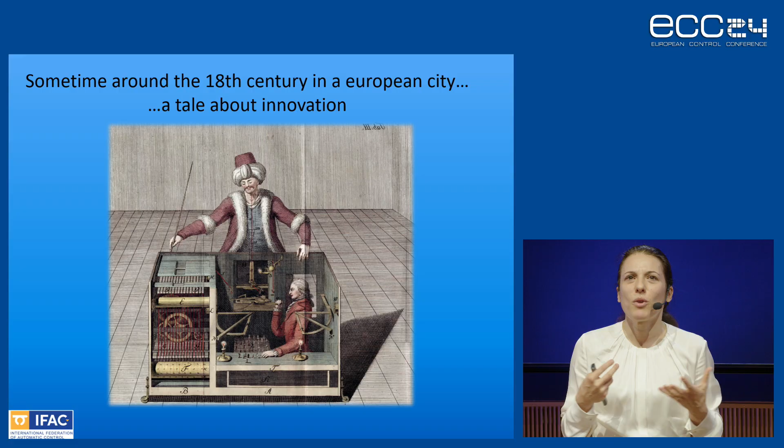During this period, one interesting device came about called the Turk, an automaton. In principle it was like a robot, presented in shows and theaters as a robot able to play chess, and it was considered quite strong—it played against professional players, and historically it seems it even played with Benjamin Franklin. It was amazing, really what we would see today as science fiction at the time.

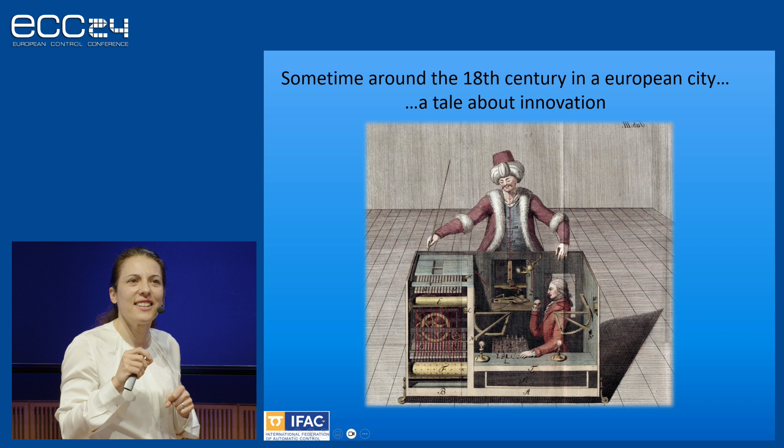What happened is that in reality it was a trick. There was actually a person hidden inside, a professional player, who would move the robot and determine the next step of the game. People would see this, be amused, and move on.

But somebody who was effectively the great-grandfather of computer science, Charles Babbage, a mechanical engineer, was fascinated and played himself with the idea of automation. He knew very well this was not possible at the time—the trend was there but the technology was not. What he did differently was, instead of just stopping and being amused, he asked: what would it take to make it happen? Where are we now? We're clearly not there, but what do we need to do? What would be an elegant solution, besides just hiding somebody inside to play the game, for this to actually happen? Several years afterward, he started moving technology towards developing the first computers.

This way of thinking is something we can apply within today's framework. Let's move to today's century. If we look at current technology and societal trends, we are still looking into automation—more automation, faster automation, better automation. And of course electrification and digitalization are in the air too—things we are all working on and aiming for in our daily life.

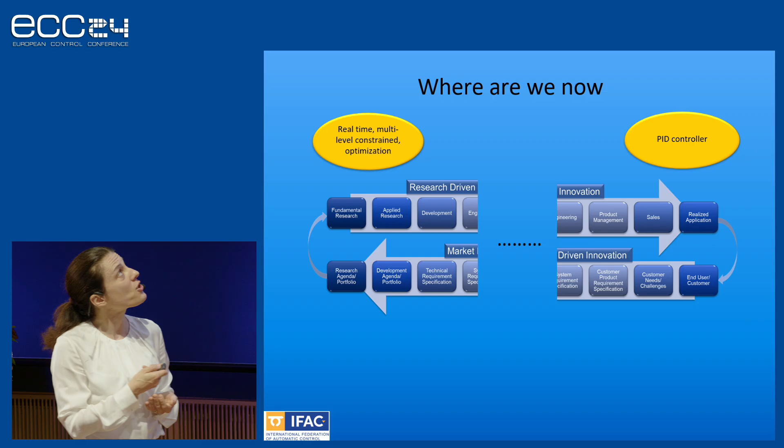On one hand, we have the academic community, the fundamental research community, which has made enormous steps in the last several decades. On the other hand, we have industrial applications—think automotive, but also industry, production, robotics—where in the majority of cases we still have things running on PID controllers.

So it's a huge gap. On the other hand, if we think about where we would like to be, there are existing technological trends and push to do more from the process and product side - things that people working in industry application want to see on their product. So the question we asked ourselves is: how can we develop an applied research agenda that could in principle be aligned with those trends, but also aligned with the real world trend and solution that we want to see on our product?

If we look a bit more in depth into this cradle of innovation, as we call it - an innovation cycle that collects the academic and industrial reality - we see three things. On one hand, we see the fundamental part of research, which includes fundamental research but also applied research, and a research portfolio, which is a series of problems that we want to solve. Then on the other hand, we have really the marketing - people that use products and solutions.

So those are users, right? Not necessarily technical people, but users that look at what they want to see in their product for the next generation. And all in between, we have engineers of various disciplines that try to translate the system requirement specification into technical requirement specification. And finally, we have the engineers that make those things happen - realizing it.

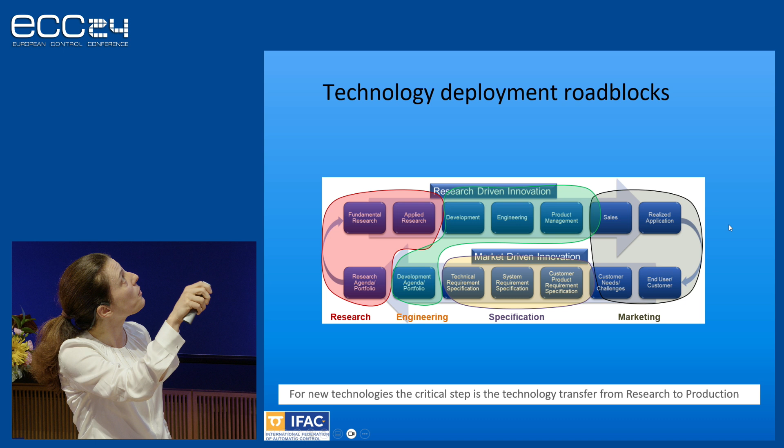So the problem is that often things get blocked here - they don't really go into the innovative part. This cycle will start maybe with some customer requirement specification that then goes up to, in a healthy company, develop a technical requirement specification for the agenda of development. This then goes into development, engineering, product management, and sales. So the whole research part, the whole opportunity, the whole potential energy of realizing much more is completely skipped. So here on the left, there is a huge potential of doing much more, but things get blocked.

One thing we did within the task force of the IFAC Industry Committee was really try to look and understand why things get blocked. To do it, we contacted different industries - we were in contact with different product management, but also control specialists that work in industry, and tried to understand why do things get blocked there. What is the issue, and how can we unblock them?

To give you another idea from the control perspective on how things stand with respect to industrial reality - if we take the map of control theory, which is by far not even complete, and look at the methodology that has been developed, and compare what the majority of industries are effectively using now, we see that we are really at a very poor ratio. So one first thing was to try to understand why this is the case - why are we still running our reality on PIDs?

There were 4 key factors that we identified. One was the different KPIs. The KPIs in academia are publication in high impact journals and conferences - this is what academics need for their career, for their success, this is what's important for the community. On the other hand, industry KPIs are mostly financially driven. Even though they're accompanied by the idea of pushing innovation forward, these two KPIs still play a bigger role - they have the majority of the weight in terms of what's requested by both communities.

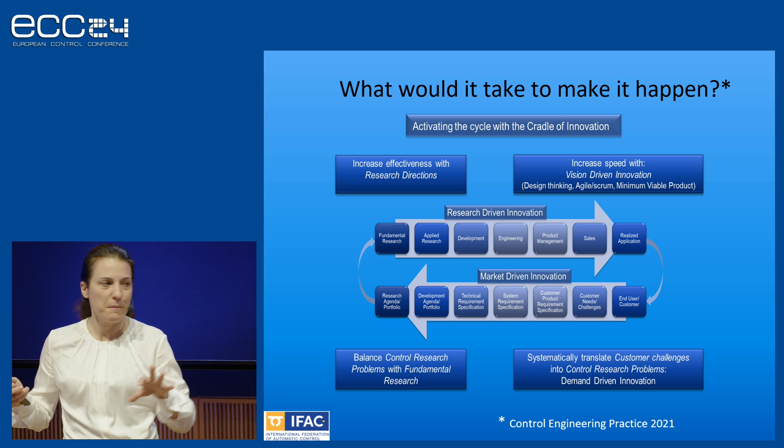Here I just give you a couple of examples of how these gaps can be bridged. On one hand, we have the cycle of innovation from research to eventually product. One typical example where things get stuck is when we go from fundamental and applied research to the jump into development.

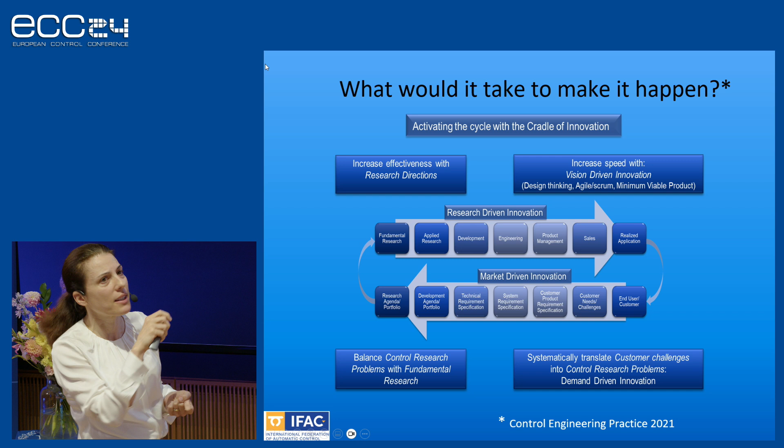One tool we identified was digital twins, because digital twins are something that companies in development and engineering use to test their solutions and do fast prototyping. The idea is, can we, from an academic solution, introduce this step a bit earlier? Could we create a small closed loop between applied research, development and engineering, and then go back and modify our solution so it fits better the development and engineering requirements?

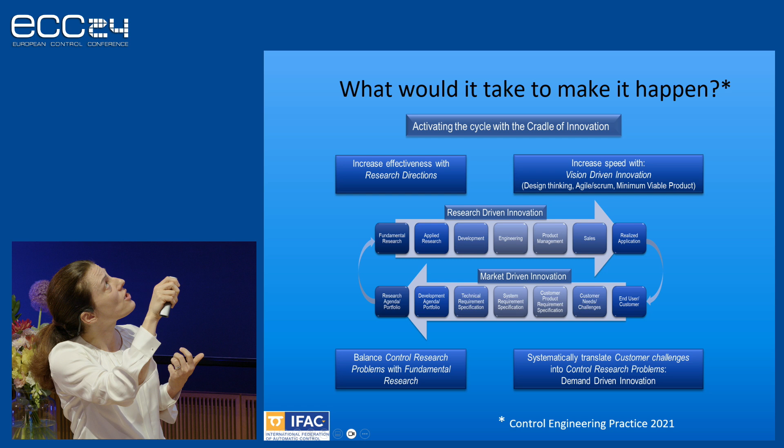Another thing is that tools like advanced simulation and digital twins could also provide some kind of demonstrator that can be used for the end customer, for marketing purposes, or to push a new solution.

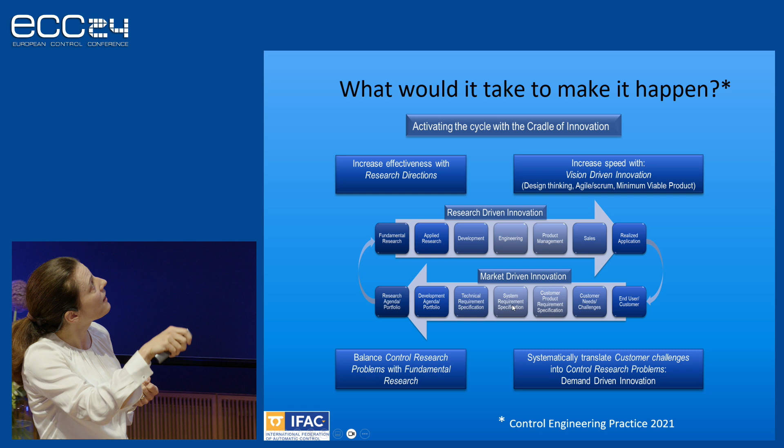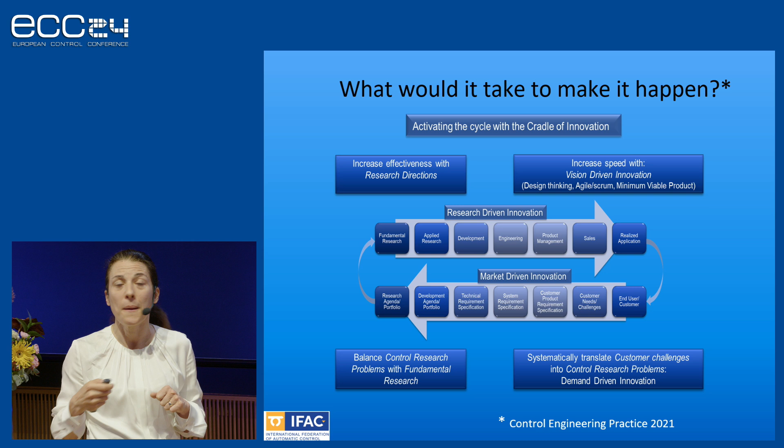On the other hand, from end user to the research agenda portfolio, it's fundamental to have what we call translators—people willing to sit down and talk with product management and understand what their problems are, what they want for their next product, and then translate these specific requirements into technical requirements and control problems.

I can give you one example from power conversion. A typical specification could be a customer coming to ABB and saying, I want a plug-and-play converter. With all the crazy things going on in the grid, plus the process requirements or industrial process requirements, I want to be able to put it there and have it adapt to everything.

Then the control engineer would come and say, okay, what can you measure? Specifically, what can you measure—voltage and current on the grid side, torque and speed on the machine side? From there you can interpolate, and the point would be: what's a good nonlinear system identification that would provide parameters for a nonlinear model of the grid or the existing load?

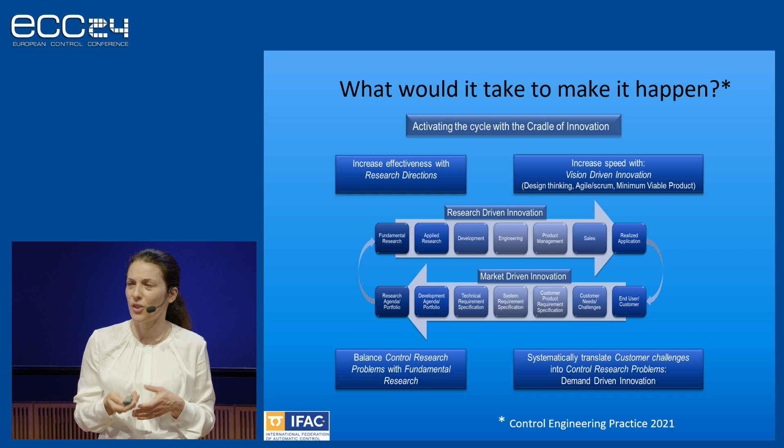So this gives you an idea of the kind of exercise we try to do across different disciplines, really trying to move toward a suitable solution.

What we did was assemble a team of more than 30 people, from both academia and industry. We put together an edited volume in which each chapter—there are six chapters—was dedicated to a different industry. The first part was on infrastructure and mobility.

There was the data industry, building automation, automotive control. The second part was energy and production: power conversion systems with ABB, robotic and manufacturing automation—which we'll hear about today from Efe and Alisa—and the process industry.

This cradle of innovation exercise was actually iterated across all these scenarios, and today we have the opportunity to hear two of these talks, from Alisa and Efe, and another from Peder. For the final part, Tariq will give us an introduction to the control horizon roadmap for 2030.

Having said that, I'd like to introduce our first speaker, Alisa. Alisa is currently an endowed professor at the University of Applied Sciences in Zurich, and previously was a group leader at Inspire. For this work, she collaborated with Efe, who was a postdoc at the Automatic Control Laboratory at ETH and is currently leading the innovation group at the Inspire Institute.

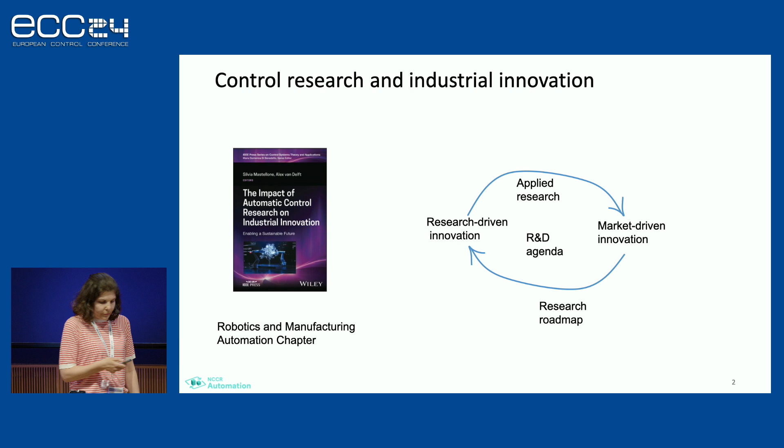And you saw the graph from Silvia. So I will show you, and Efe as well, examples, concrete use cases on how real challenges lead to innovation and valuable research.

In manufacturing and industrial robotics, there are two main innovation drivers: Industry 4.0 or 5.0 nowadays, and sustainability. Industry 4.0 is all about the availability of data, the computational tools we have nowadays, and connectivity in the cloud, which enable a lot of innovation. That innovation translates into advanced functionality and autonomy of the systems, improved decision-making capabilities, and optimized production, which is very important for industry.

And talking about optimized production, previously this kind of optimization was very much motivated by economic performance indicators. How does that work? So economic performance indicators, and technology development, was very much centered on this blue-green part that you see.

But nowadays, more and more, it becomes important to think about emissions, environmental indicators, and even societal performance indicators. This means our systems should be not just faster, better, and more efficient in the standard sense, but also cleaner, and adaptable.

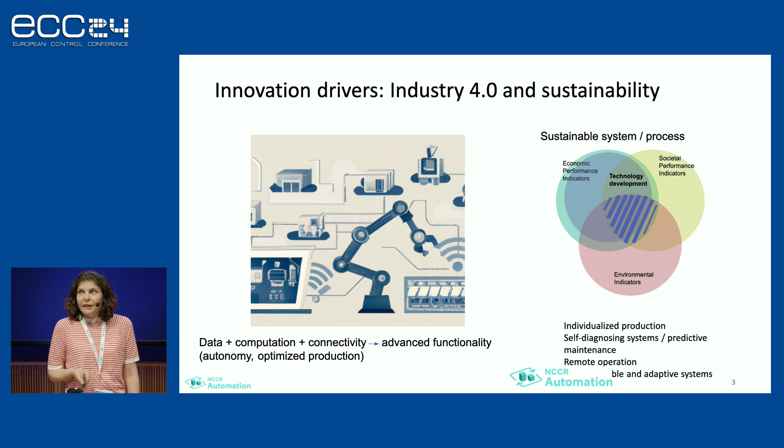They should be able to produce just single parts, self-diagnose, and also be operated remotely. And how to achieve this kind of adaptability is where our research comes into play.

If we put all this together, the big question is: how can we build manufacturing systems that can produce single batches, a batch of a single part, sustainably? And can the data we access help us achieve that?

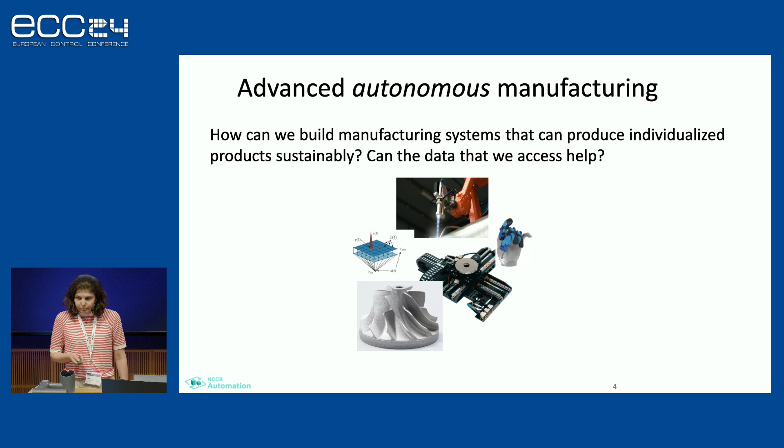Think about such systems and autonomy. Of course, robotics systems come to mind, and we can apply the same kind of system thinking in manufacturing systems.

Basically, the information that comes into such a system via sensors goes into a perception module where it is processed, and then mapping and planning is performed in the planning and decision module, and finally that goes into the control module and gives commands to the actuators in the manufacturing system. So this is similar to robotic systems.

In manufacturing, we need something extra, because we cannot measure all that we want to measure. We cannot look at exactly where the tool is drilling at the surface. That's difficult to sense, so we need to be able somehow to model and predict that.

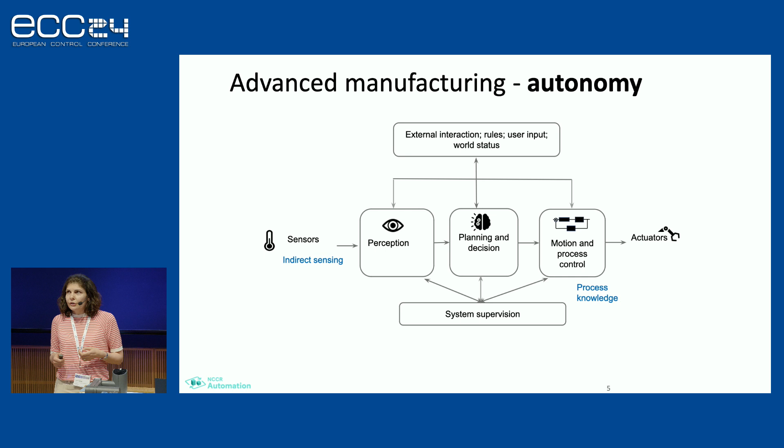That's why I put there indirect sensing. We also need some additional process knowledge, so what is happening exactly inside the part which is being drilled. And that comes from either simulation or some domain knowledge.

Staying here with robotics, we can make a parallel with the levels of autonomy for autonomous vehicles, where the low level is basically manual driving, and you need to look at the road and turn the wheel, whereas as you go up in automation, you become more and more hands-off, until reaching the high levels, where the car goes by itself, like the Waymo taxi, and finally it can go anywhere, not just in limited environments.

That's the dream. And if you think about manufacturing systems, where autonomous vehicles are at level 4, for manufacturing systems we are still between level 2 and 3. So very few such systems are actually able to self-adjust and be operated autonomously; they always require an operator.

Even very few of such systems have closed-loop control at all. They just get their parameters tuned before operation, and that stays. Then a new set of parameters needs to be found for each subsequent part that needs to be processed. So they cannot really operate with a large number of scenarios or parts, and they cannot operate in changing conditions, which is the opposite of autonomy.

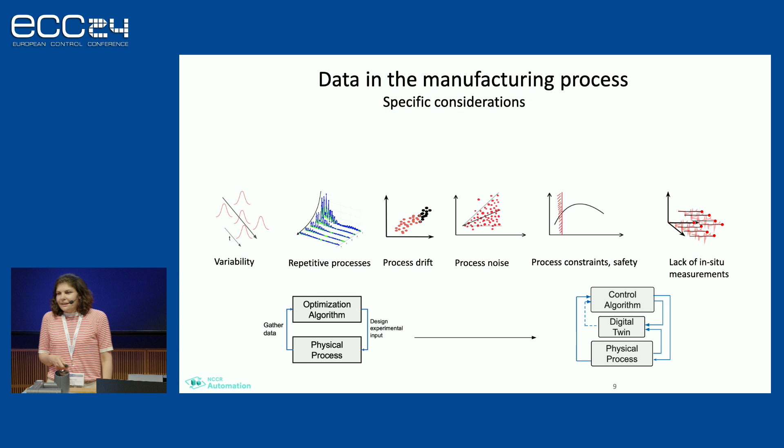This data that we gather can also help us build digital twins of such systems. The digital twin is a virtual replica of one instance in the manufacturing plant, let's say one machine. It captures one single machine.

Now I will start with a method which is very data efficient, so it needs just a little bit of data such that the machine can readjust its parameters. Later you'll hear more about digital twins and other methods.

This method is also known as Bayesian optimization. The goal is to optimize some performance metric, so we want to find good parameters for that metric. That could be good controller gains, or good process parameters of a manufacturing process, for example feed rate or spindle speed in a machine, and so on.

In this case, I will demonstrate it with tuning gains of a motion system. We have this performance metric, let's say the position error, and we want to find good controller gains for that, but we don't know where they are. We need to do that very quickly, because in manufacturing terms, you don't want to produce 100 parts to find good parameters. So we do very few measurements - just these two measurements.

Now we can use probabilistic models to model the dependence of our gains on the performance metric, and predict for the whole range what the performance is. We can predict that with very small uncertainty around the measurement points and with high uncertainty where we don't have measurements. If we have some auxiliary way to say where to measure next, such that either we find a better optimum than the one we have so far, or we learn a lot about the whole behavior of the function, that would help us.

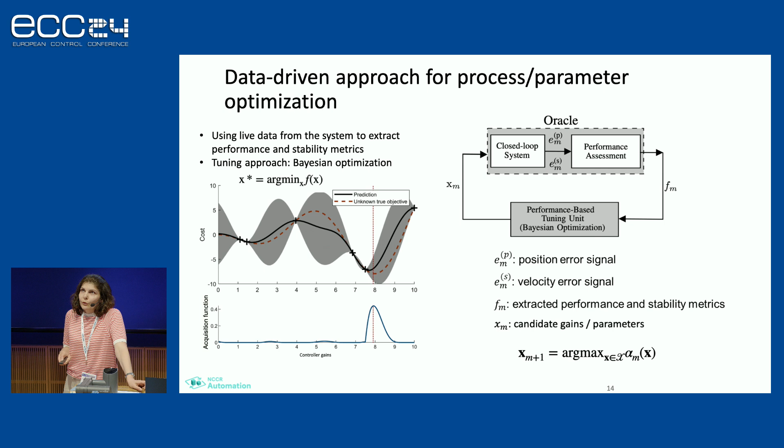This turns out to be efficient for manufacturing processes, because the goal is not to model the process very well, the goal is just to very efficiently find the optimum. On top of that, this could be combined with safety constraints, so with every iteration where we need to update, we don't violate the safety constraints of the machine.

We did that for all these systems that you can see - for additive manufacturing, for CNC machines, and for plasma spray coating. I will show you a particular example about a motion stage.

Basically, we define here that at every move of the stage, we want to find the best possible performance, and we don't want to excite vibrations. What we tune are the gains of the controller in this machine, and we cannot change the controller itself - we are limited, the controller is fixed. So we can only change the gains, and we apply this method.

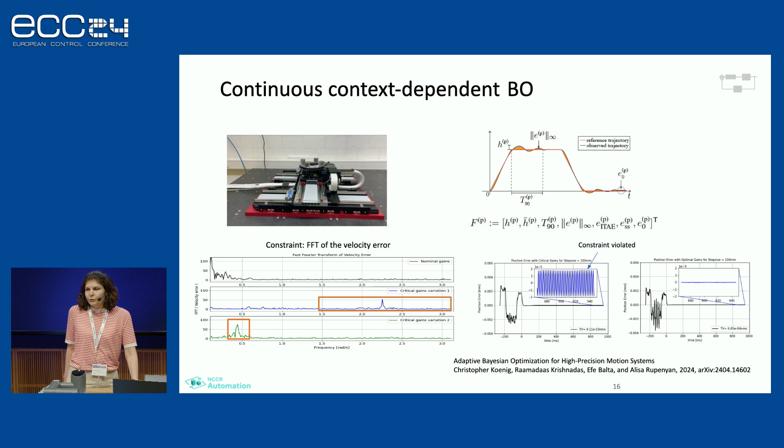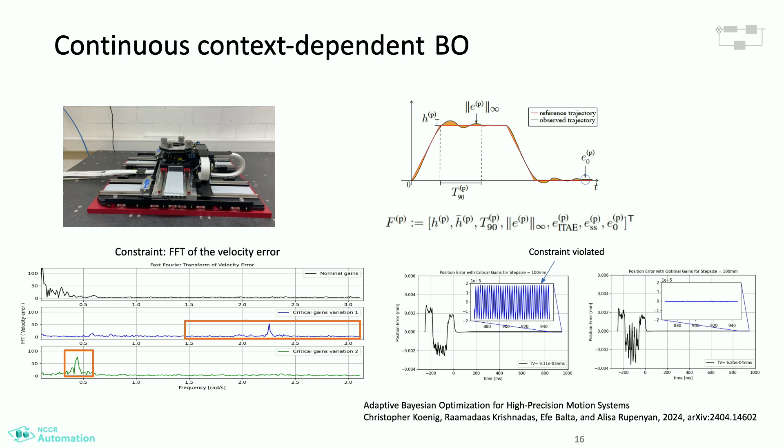We have a safety constraint here - this is the velocity error, the Fourier transform of the velocity error, which with every possible measurement that we do, we monitor to be below a certain threshold so that we don't see vibrations and don't get instability in the system. Because we want to continuously operate this optimization while the system is in production.

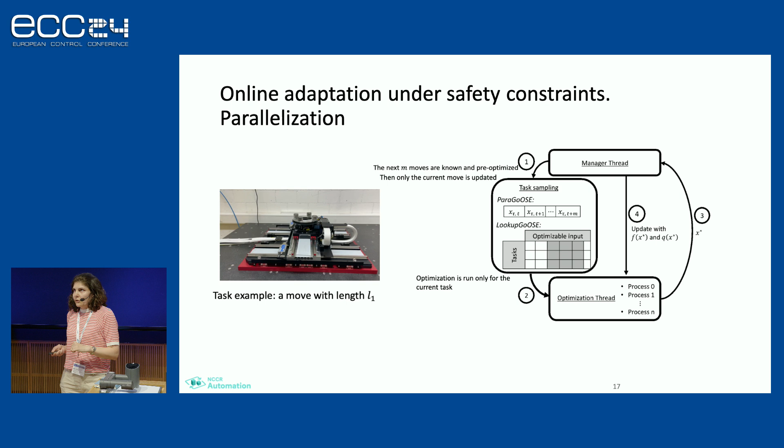To do that, we have to also be able to predict for the next moves what should be the good parameters, and we do that as a separate function of the length of the move. So we need some kind of parallelization and synchronization to do that, and we do updates between the runs.

Every time after the system moves, we update for a whole horizon of different possible moves and take into account the stability considerations, and that turned out to work pretty well. We were able to show that we can adapt to different payloads, so we can put different instruments on top of that system, and also different lengths of the move.

We compared it with various different controllers and tuning methods, and it worked better than those. So we were happy for that, and that was a real industry collaboration with the producer of such stages in Switzerland. It's about the optimization approach that you mentioned before. Yeah, it's indeed a good approach, but maybe the main drawback is the number of iterations that is needed to find a solution, even if it's not optimal, but it can be acceptable. Sometimes with companies, it's really difficult that they give you access to their process.

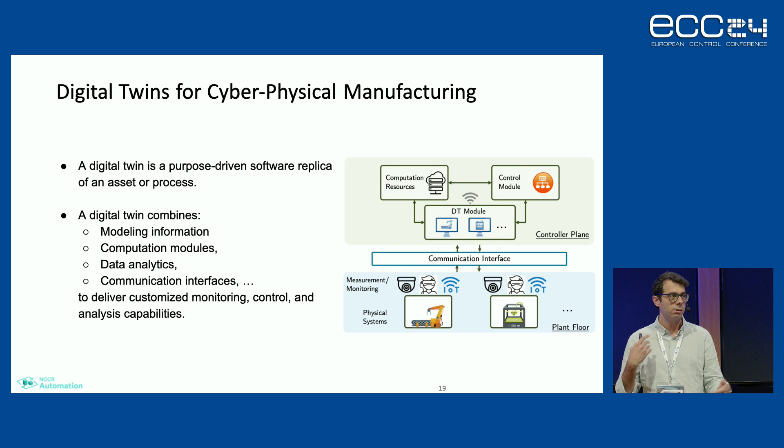And the idea is to combine modeling information, computation, data analytics, and some form of communication interfaces. So I think one of the key things is that it needs to reflect the specific instance that we're dealing with rather than a generic model, and this bidirectional, either for monitoring or controlling data flow, I think is some of the key aspects.

So one idea we had is, okay, actually it's a really nice follow-up to the question we had about multiple runs and accessibility to the machine. So then we asked the question, what if we cannot run, or we do not want to run additional steps on the machine to tune the machine? Well, a simple idea would be that I have a model of that machine, so I'll just run some trajectory optimization and put it on the machine.

This is really following that ideology to say that now we have this similar but different precision motion stage we have in Zurich, and we actually had a very detailed, high-fidelity neural net model of this precision motion stage. It's accurate up to the repeatability of our sensors. It's a data-hungry model, but we can tune it autonomously, letting the machine run for a few minutes, collecting data, and then we train a neural net.

Now, the question was, can we integrate this into a digital twin such that we can do trajectory optimization using this complex model, and then do everything virtually, and then take the inputs and run it on the real system. There are certain details I'm not going into here, but the idea was to use learning-based model predictive contouring control, learning between a nominal linear model and the digital twin model.

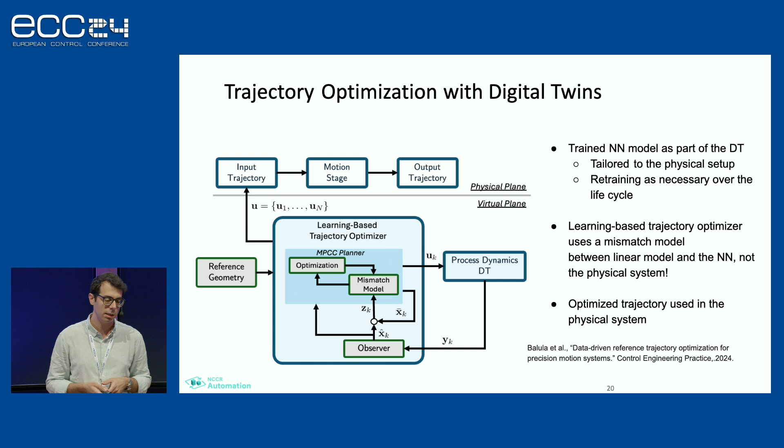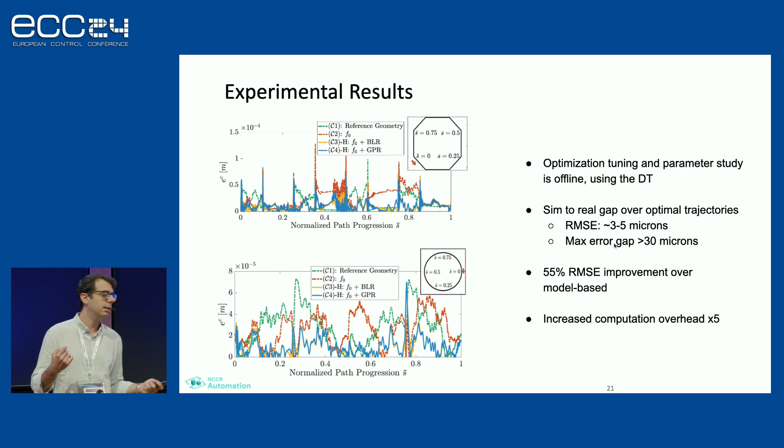When we did this, the sim-to-real gap of what we optimized versus what we ran on the machine, in terms of RMS error, was actually quite good, 3 to 5 microns, but the maximum error gap was much higher, indicating that certain aspects of the liveness of the system cannot be predicted by the digital twins. But in the end, we were able to improve the performance by about 50%, with increased overhead due to our computation.

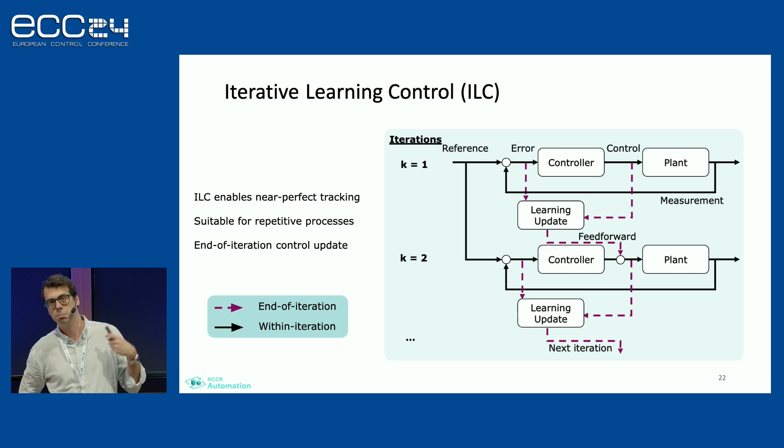Another idea we played around with was iterative learning control. In the interest of time I'll be brief, but the idea is we run one trajectory, learn from it, and update our input in the next trajectory, which is quite perfect if you have a repetitive manufacturing process. We've developed methods to deal with convergence guarantees under model mismatch, constraints, and noise.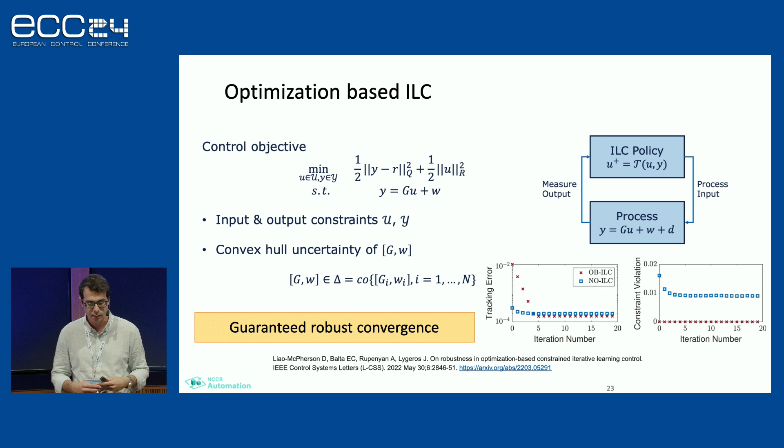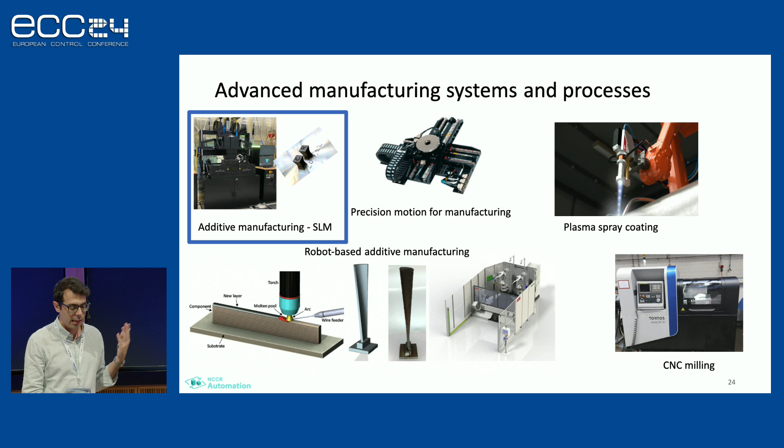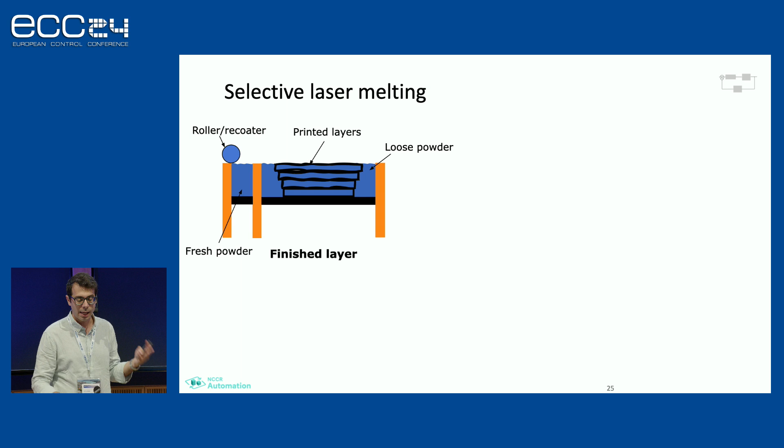The idea was that we prototype this in precision motion stages, and we asked the question: could we go to some of the other processes shown in earlier slides? We wanted to test these repetitive control, iterative control ideas on 3D printing applications, specifically metal printing, where we lay metal powder on each layer, then use a laser to melt the powder and let it cool down to obtain a three-dimensional geometry layer by layer.

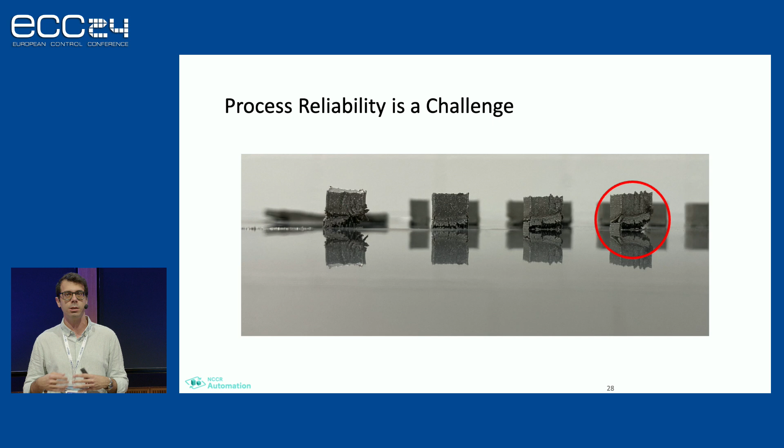The reason we wanted to do this—and this is one point I wanted to highlight—is not that we had the controller and looked for an application. We were approached by colleagues doing this application, saying there's quite a bit of process variation and reliability issues due to things like thermal management and warping in the system. So we thought we could use these ideas to build layer-to-layer control loops.

So what we ended up doing on our experimental setup was build this layer-to-layer control loop, where we use thermal cameras to look at the temperature field between the layers, and then use our ILC-inspired controllers to print two parts side by side.

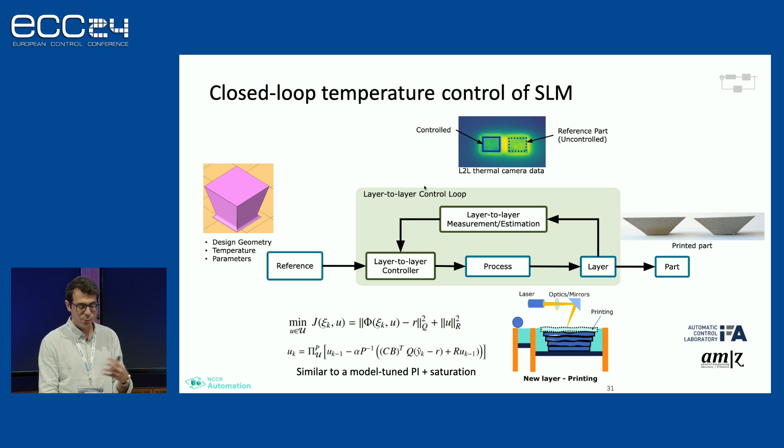I'll stop here in the interest of time. There are a few more slides, but I'll jump over—we also did this for in-layer control, so that was the rest of it. I think this will come back again on the panel talk.

Really, just to reiterate that manufacturing and robotics are data-rich application areas, and there's quite a bit of high-impact research opportunity by leveraging control optimization. We have a lot of really nice examples where practice inspires theory, and this is thanks to our colleagues—there's actually a very large team behind this work and our funding.

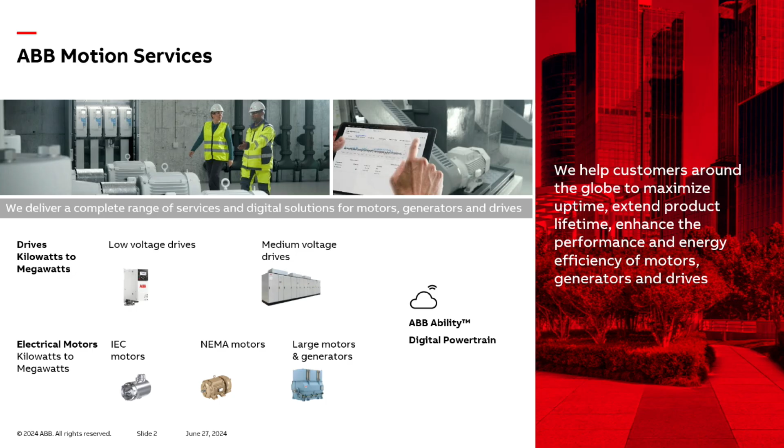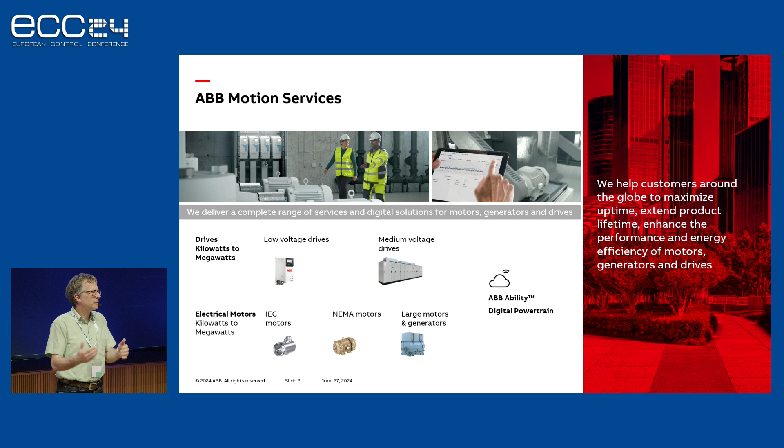Without big introduction, I'm with ABB Motion, and I have just one slide quickly showing what that actually means. It's called industrial drives also, electric motors, basically moving things in industry. My presentation will have no equations inside, and it has also no curves, because I thought I would rather talk a little bit about cases where we managed or failed in moving a control approach into a product and into money, basically, in the end of the day.

So where do we stand? Where could we go? So when we talk about a drive, it's actually a drive system, and these things can be fairly large. They can stand next to each other, be connected to the same process. They can even be maybe very hard connected with each other. And so you stand actually in front of a system that has many similarities with the energy system, but it's moving mechanical energy or some process chemical energy in a plant, but still it's a coupled thing.

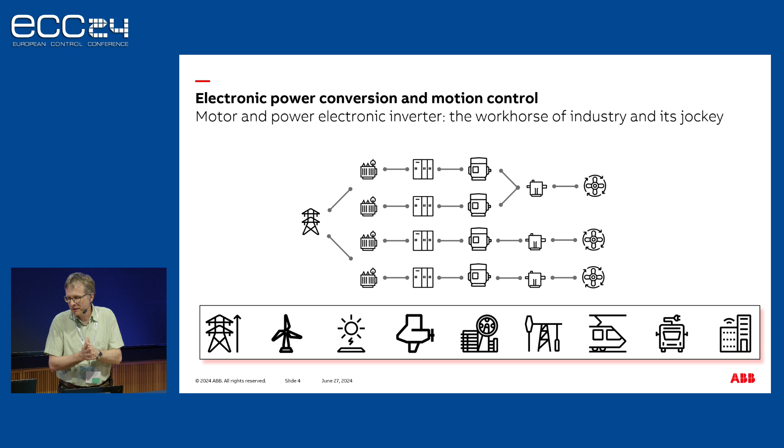So such a variable speed drive, yes, it is actually, well, it should be called a variable torque drive. It is actually a torque source, but last but not least, it's a control device normally. And that's what is expected by the user that it should do. It should ideally read the mind of the user and do the perfect thing that he just had in mind. Applications are really everywhere in industry, but also like moving ships or in transmission, moving power, compensating reactive power. So there is numerous applications for more or less the same hardware building blocks.

If we take a control perspective on it, what it actually is today, then we try to structure it in layers. We try a divide and conquer approach. So we have somewhere some power electronic systems that we have to control, and that has typically to happen on very fast timelines, 1 kilohertz, 10 kilohertz in this range. That's what many people refer to as a topology controller, and people are doing research in this corner, still do.

Then we have somewhere a middle range application control. So as an example, that could be controlling a motor speed, but relatively abstract, not knowing what the speed actually means. Yeah, the speed is responsible for discharge pressure of a compressor or for mole flow in a compressor. That is then actually the third level where we can talk about the system, drive system control. And that's actually the most interesting one, because this is the one where the customer is sitting, the one who invests in a drive system where he has some demands and some expectations how his system should operate.

I on purpose put below as examples, I put the industrial process side view. So the topology, this is controlling currents, maybe controlling power flow. Then in the middle range, we have typically torques and speeds. And then as an example, discharge pressure of a compressor.

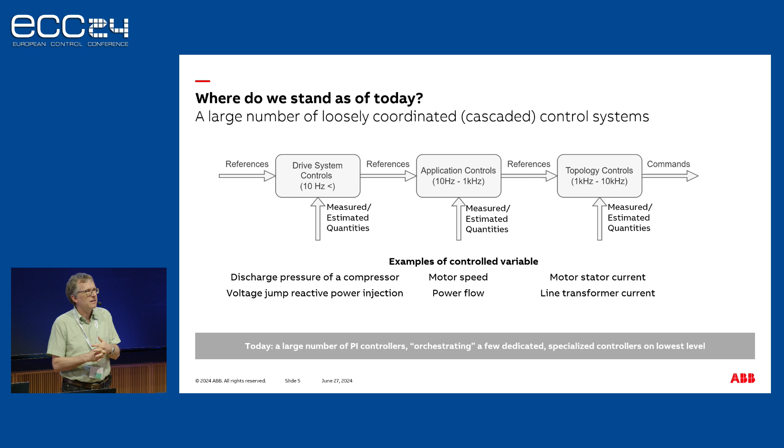But we should never forget there is also the other side. We're also connected to the electrical grid. And I've been in a few sessions now over the conference, the big topic on how to handle energy flows in the grid and help stabilizing the grid. So the line transformer current is again the low-level thing that we would actually control, but that's not even half of the job we should be doing. We should control power, reactive power, active power, but then we should also do more things. We should do good things to the grid, like helping controlling the voltage in the grid, or helping dealing with transients in the grid and mitigate them.

But traditionally, we tend to work in these silos, and that's probably one of the things that has to change in the next years, that we step out of the silos, or that we at least start to find cleverer interfaces between these areas of control.

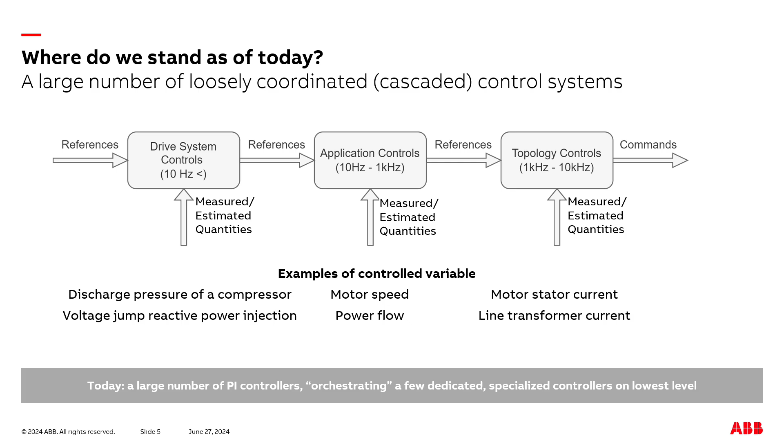And I tried to put that a little bit on a timeline, and I think we are not even moving with the same speeds on this timeline. On the motor side, when it comes to controlling power going into a process, we are actually moving slower, is my impression, than we are moving on the grid side when it comes to do ancillary services on the grid. So, I mean, traditionally, yeah, we have been controlling the speed of machinery, or on the grid side, maybe helped a little bit in providing frequency regulation, inertia support to the grid, things like that have been done already now since 2-3 decades.

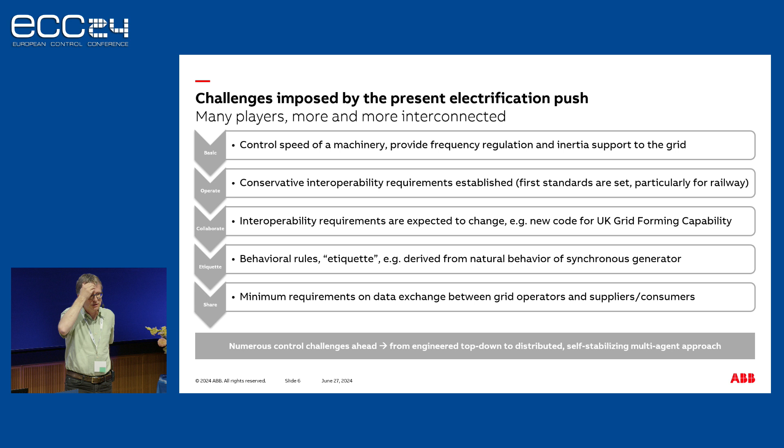And then on the grid side, I think interoperability has become a topic that was not only researched, but has also found results in norms that came up, especially when you talk about the railway industry. What is interoperability in this sense? It's how does an active unit have to behave in the grid so that things are really working together.

I mean, there is one controller, potentially a pretty aggressive controller, that just has some bigger target in mind and will just pull power from the grid, whatever it takes—jumps or oscillations—and may actually disturb another converter, which is maybe a little bit softer, and then doesn't get the power because the other one is unfriendly and takes all the power, hampering the voltage of the grid by its behavior.

In railway, this has been seen since the late 90s, and there are now norms telling how converters have to be, but these are typically very conservative criteria that have to be fulfilled—total passivity of the converters throughout the whole frequency range. Yes, that will work, but maybe conservative is not always the best.

The complexity the grid gets and the complexity the applications get—on the grid side, interoperability has now already taken the next step. Some countries have made big steps forward, like the UK, where they clearly identified a long list of ancillary services that an active unit in a grid could fulfill. And that needn't be a windmill or an SVC, a static converter doing reactive power compensation—this could also be a very large industrial plant driving some pumps that can alongside also provide some of these services.

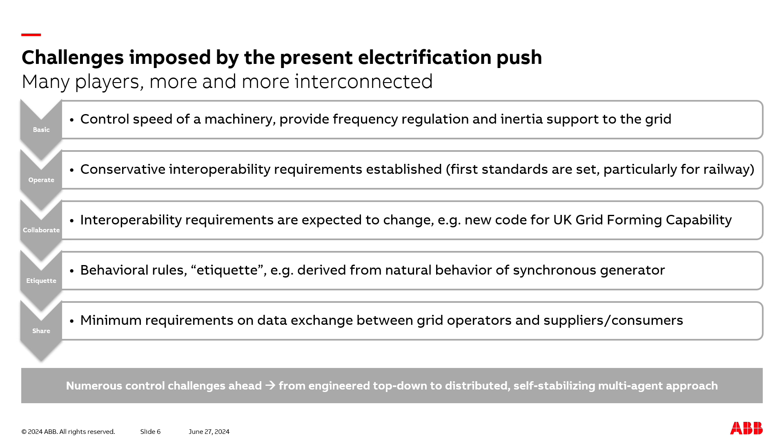And then the next thing, I think, is really behavioral rules that we expect to come up, so that we're not just putting some equipment somewhere—we're putting an agent into an industrial process, and this agent gets some rules he has to fulfill. He has basic rules he has to fulfill, power flow, but he also has etiquette—some things he's allowed to do and some things he should never do, and behaves like this without us doing a top-down design of a classic control system.

And I think what will come then as a last thing—we talk a lot about using data. Using data for analytics is now becoming more and more common. All these relatively clever devices that have a lot of computational power can collect a lot of info on the health of the driven equipment, but they could actually start to share that information also for the benefit of controlling things more optimally.

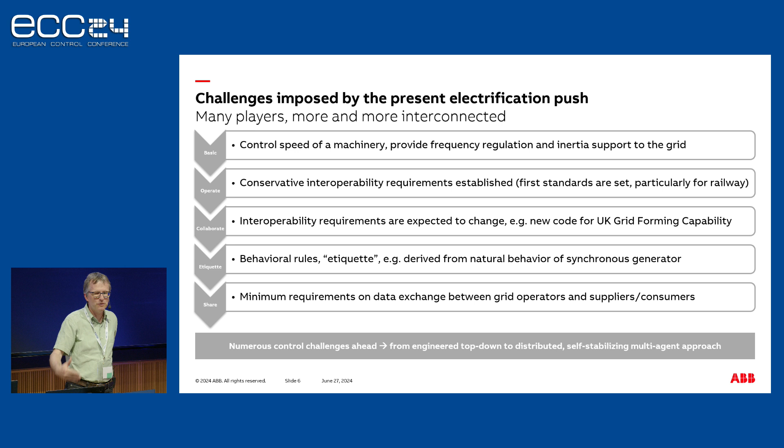So I chose two case notes, one that was really successful, a successful transfer, but I want to use the opportunity here to tell a little bit of the story, because sitting here in some of the presentations, it occurred to me that probably we have an issue of time synchronization. So it's not just that industry is slow, but we have to be in sync.

So if you develop products that you sell for 10, 20 years, which is quite common for the products that we have, you have to be there with a new technology at the right time. So that's the one thing. And then you have to qualify it, and you have a chain of customers.

You sell, or we, for example, sell to a compressor manufacturer. The compressor manufacturer sells the system to a pipeline operator, and then that guy actually probably even has some other involved parties really running the show. So you have to convince everyone.

So the timelines are different, and then this morning I also thought maybe we're also violating just the sampling theorem—that the hypes, the highs and lows that we see on technologies in academia, sometimes they're just oscillating quicker than we are able to sample. So my master thesis was a self-learning controller using three neural networks.

It was done at ETH in Zurich, together with ABB, in 1994. I see papers about it now again, and we flopped completely. I mean, it worked, but from a money perspective it was basically a flop, because it had numerous issues that we figured out we would never be able to resolve if we started using something like this. Now, 20 or 30 years later, we're moving in big steps further, but maybe the hype was already over by 1997 when there was that economic crisis in Asia.

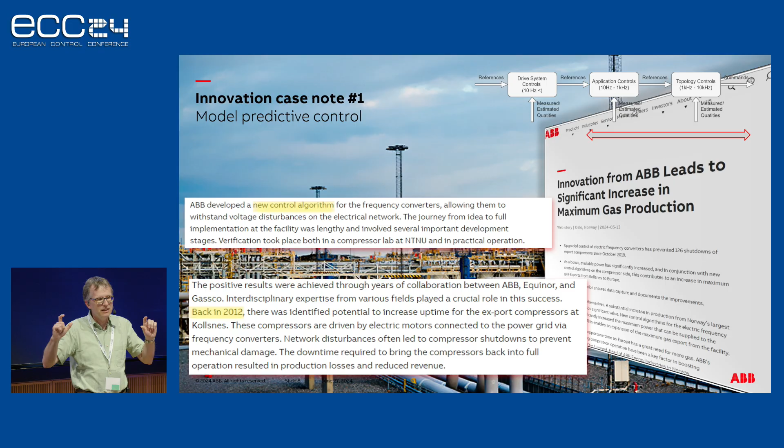And we felt MPC would also be a good approach in this case, because normally we're dealing with constraints coming in, and especially if two or three come in at once with just PI controllers, if that wasn't thought of before, you're going to fail.

So 25 years later, we have model predictive controllers running in one of our oldest drives from a technology perspective. These are drive systems we've been selling since the early 80s, from a hardware perspective, but we put a completely new control system into it now using a model predictive approach to do the topology control in this case.

These are converters connected to a grid. The converter itself has a storage inside, a big inductor where you can basically store energy as a DC current, and then on the other side you have a synchronous machine where you rectify, or chop this current into AC, so that you can turn the synchronous machine at the speed it needs. Throwing MPC at this problem brought us exactly the advantages we were hoping for.

These systems are interconnected. The case note we had, and this is literally the 25 years we've seen go by, is an announcement, a press release we just did in May this year. The plant has been up and running with this model predictive approach for roughly four years now. This is in Norway, a gas export station with 6 drives, driving 6 compressors, 41 megawatts each, accounting for about a sixth of Norway's gas exports, going into a pipeline towards the UK.

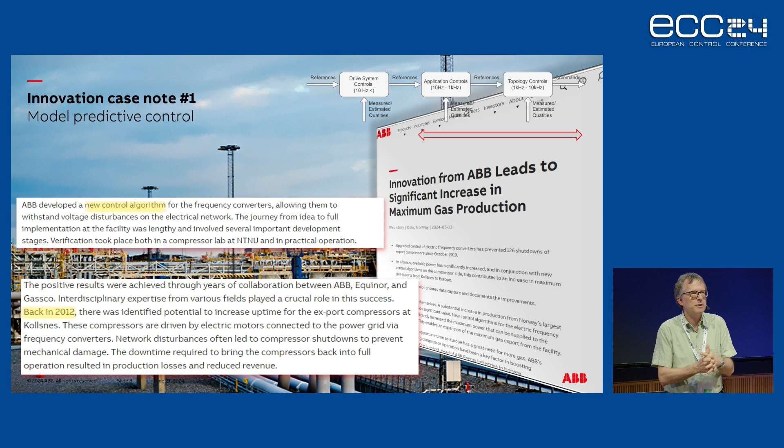In the past, this brought down the export station several times a year, especially over the winter period. Equinor, the Norwegian gas company, allowed us to publish that since it's been in operation we've saved about 126 such events where the whole export station would have come down. The current controller just struggles through every situation, but MPC doesn't give up, because it knows exactly what options are still available, how to fire a thyristor and still run some current and still drive the compressor.

Another example is also from the oil and gas industry. When you liquefy natural gas, it's basically just a huge fridge. There are compressors cooling down a refrigerant, and with this refrigerant you're liquefying the gas in 2-3 steps. We have been approached by the end user, the company that runs this facility.

This facility has several such lines cooling down the gas, on a massive scale. The process is actually fairly simple, you just want to cool down the gas. You can play a little bit between the different lines, scheduling which line is producing how much. If one line goes down for whatever reason, you basically have to burn the excess gas, because you cannot stop the gas coming from the well. So it's pretty dramatic, and they have a very big interest in having very high availability of the plant.

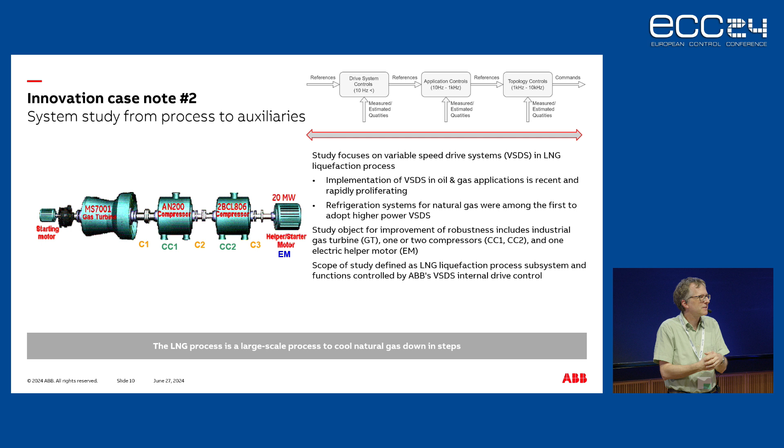Also, when we went into this system, we found hardware failing is actually extremely rare, maybe once every 5 years. But when going through all the reasons why the plant had actually tripped, we see that it's again this balance-of-plant issue: one controller is trying something, hits a limitation, cannot really interact with the other controller, and in the end just brings down the whole plant because the three control levels get confused.

So we started to look into it and said, let's come up with something. We called it a soft trip. It's something a bit more than an alarm, but it's not a trip either. When you get an alarm from a system, the operation goes on, but in this middle state we say the operation is actually deteriorating in a predefined way. For example, a torque limit kicks in, the motor runs hot, the torque limit kicks in but it continues to run with a torque limit. A signal is sent to the next layer of automation, and that layer can decide what to do with it.

Of course, you still have a number of trips, but it's actually surprising, it's about 10% of the things that could potentially shut down the system where you have no option, you have to shut down. But 90% you can turn into something more soft if you think a little bit about strategies.

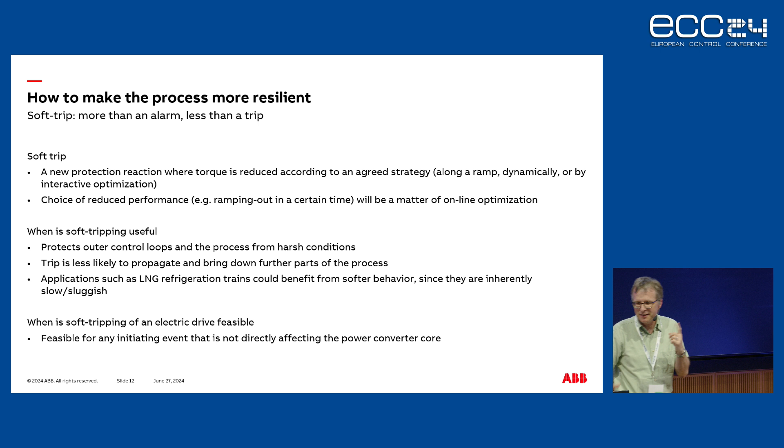But then the thing is, how do you make these processes work together? This is actually where I wanted to bring a bit of a negative example. What we really managed is that we've started a countdown: we limit the torque and count down, and depending on what is happening, you get a minute or you get 5 minutes to react.

This has also been implemented, so you can imagine, as we speak, something would happen, some operators will see some red lights and horns, and they are running around trying to reshuffle production in order to save the processes as a whole.

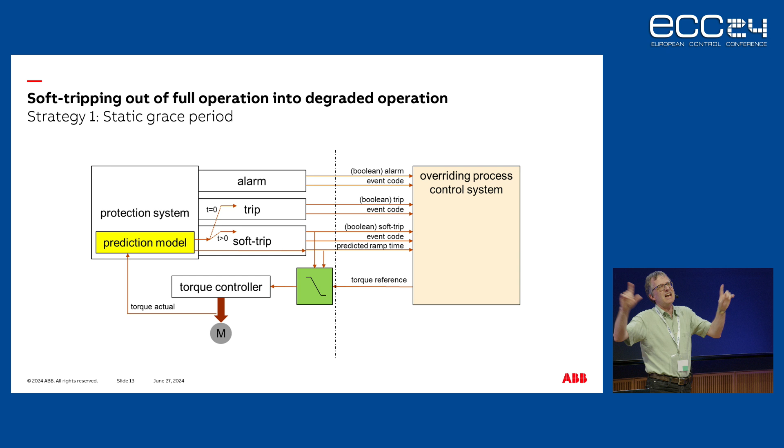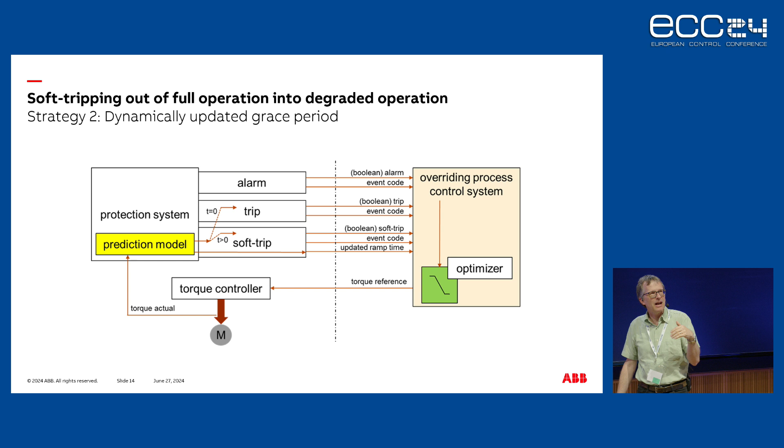But of course we said, well, at least the minimum we should be doing is not just giving a countdown, but also showing a prediction. So we say, I'm running now at reduced torque; if you allow me to run at even further reduced torque, then I can operate forever. So I give the next layer some option to decide.

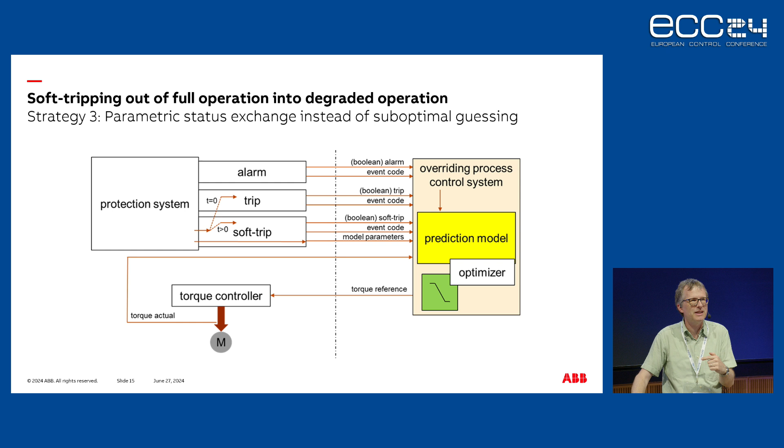And then the last thing we were thinking, well, actually the next layer should also be an MPC like we are, and we should parameterize somehow our behavior and tell it, with a handful of parameters to be defined, our health status, so an optimizer on the next level can really optimize. Didn't work out. We can discuss in the panel discussion why something like this is not working out. In brief, there are too many players.

So to conclude the research outlook or roadmap, I think we have to become object-oriented with how we do control of all these subsystems. Not brute force, top-down or bottom-up, but really objects that follow rules, that have interfaces, can talk with each other, and then design them like this.

Reality is we have many hardwired things. We just get a 4 to 20 milliamps signal telling us how quick we have to run or how much torque we have to make.

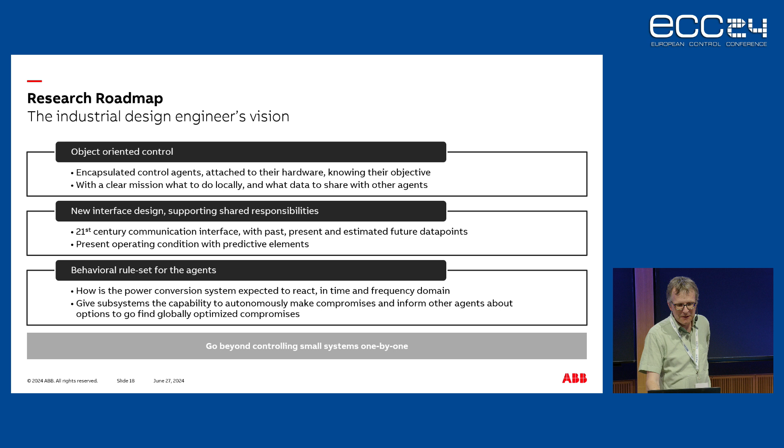Such things can also be found in the book chapter, of course. We have detailed a little bit more what we think in which directions we should be going. It's always both sides, motor side and grid side. But I think we have to shift paradigms a little bit here. So with this, I'll conclude my part.

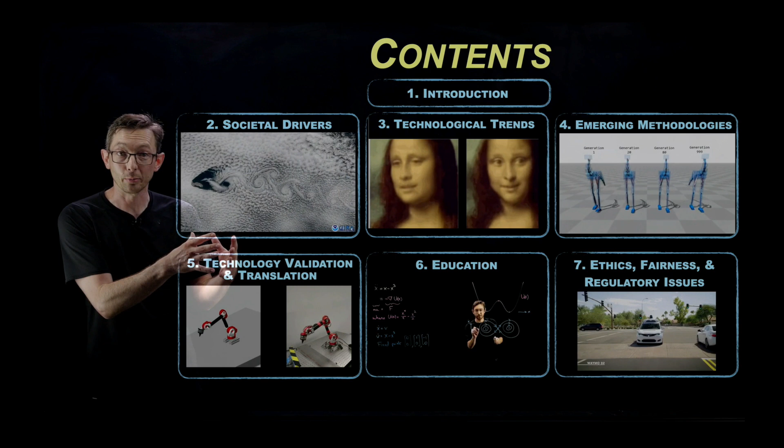The last big chapter is chapter 7, ethics, fairness, and regulatory issues, which addresses what are the actual issues with deploying societal scale control solutions to solve these challenges. One thing I really like, and I've seen in lots of chapters in this roadmap, is this focus on fairness and equity in how we deploy these control solutions. If you think about the equitable distribution of medical resources and medical care, that's actually a control theory problem, a constrained optimization problem. So I really like this modern perspective that we need to be thinking about fairness, ethics and equity when dealing with large-scale control theory solutions, so that we don't only help a few and not everybody. A neat perspective here, and an important one too.

Finally, chapter 8 is a conclusion, summary, and recommendations - how do you take this all together, what are next steps, how do we get started, how do you join the cause? Really excited to walk you through this. Again, this is a collaboration with a number of amazing researchers that I respect very, very much. I hope you get as much value, education, and inspiration out of this as I did.

All right, thank you. I hope that will motivate some of you to download and read the report or parts of it. What I want to do in the rest of this talk is give you an overview of some of the content that's more relevant to the theme of this session. So again, I'm showing you the overall table of contents, just so you can take a glance at it if you can read that at all.

But then the two parts I'm going to focus on are, one, climate change mitigation and adaptation, because I was a co-author on that, and in fact it's organized around industry sectors and application sectors. And the other one is technology validation and translation.

Regarding this chapter on control for climate change, there's been a recent issue of Control Systems magazine with an article that's an extended version of that chapter, so you can access that now. It really addresses climate change, talks about it in a broad sense of what the challenges are, but also specifically in terms of what are the targets of opportunity for control scientists and engineers.

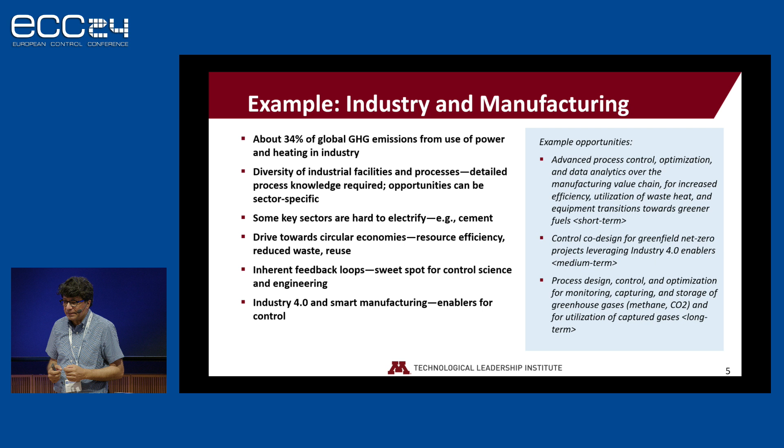The example opportunities we highlight here are categorized by short-term, medium-term, and long-term. Short-term means we have the potential to have impact at societal scale by 2030, medium-term is by 2040, and long-term is post-2040.

So the example opportunities: advanced process control, optimization, and data analytics over the manufacturing value chain for increased efficiency, utilization of waste heat, and equipment transitions towards greener fuels. Again, referring back to that fact that we can't just expect electricity to do all the job for us, we'll need fuels as well.

Control co-design for greenfield net zero projects leveraging Industry 4.0 enablers. Of course, there are brownfield facilities, facilities that already exist, and we need to reduce their carbon emissions. But a huge opportunity is new projects, greenfield projects. Now we have the opportunity, a fresh sheet of paper that will provide us more opportunities to apply some of our techniques and reduce emissions.

And lastly, focusing more on storage of greenhouse gases such as methane and CO2 and their long-term utilization. That's also a really important need. We'll need to do that as well. So that was one example of that.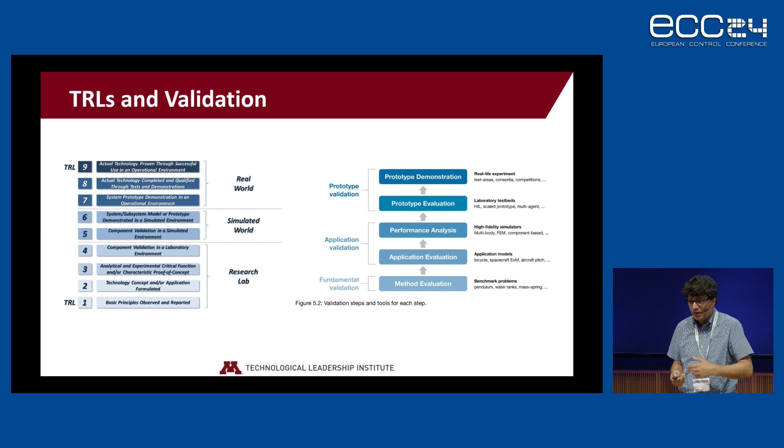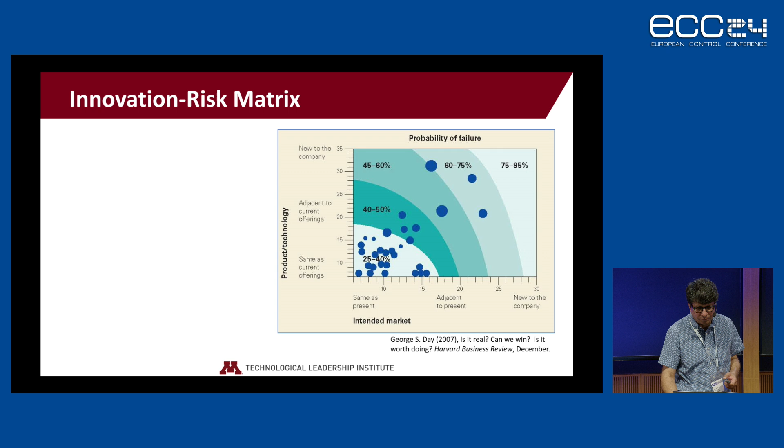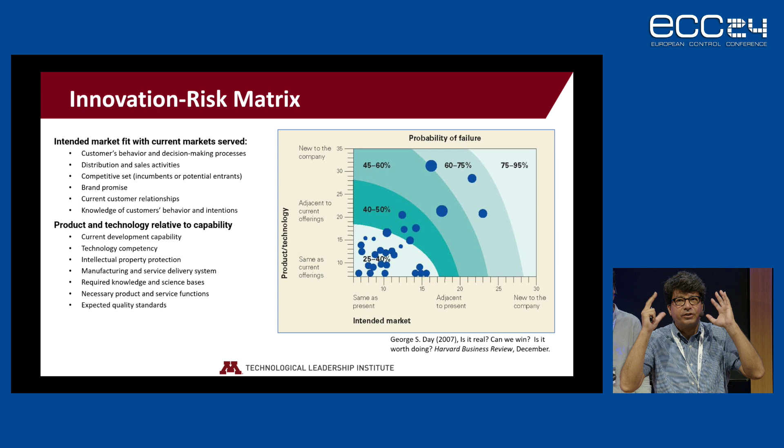So this is something to keep in mind, just how these factors matter in what you do. This is the sort of thing we teach in our program, and we get into the details of that. Thank you for asking the question, Sylvia.

Thank you, we had another question from Alf. I have a follow-up question to George's comment earlier—I totally agree. It's a fact that if you look at MPC applications, they get switched off after a while. Can we turn that around as the automation suppliers? Can that be turned into having a different business model?

Not selling the installation as a one-off project, but actually selling the function of model predictive control and taking responsibility over the lifetime of that.

This goes vice versa all the time, because in this Equinor case, we already had more responsibility for some of the process control things that they have. That helped us prototyping and working through up to TRL 7 and then 8 with them. As we go into the future, you will see more and more of these models that we are running, keeping simulation models alive for a customer, so that if the next generation is coming up or the plant gets some add-on, an extra process is added, we can investigate. We are responsible to keep these models alive and updated.